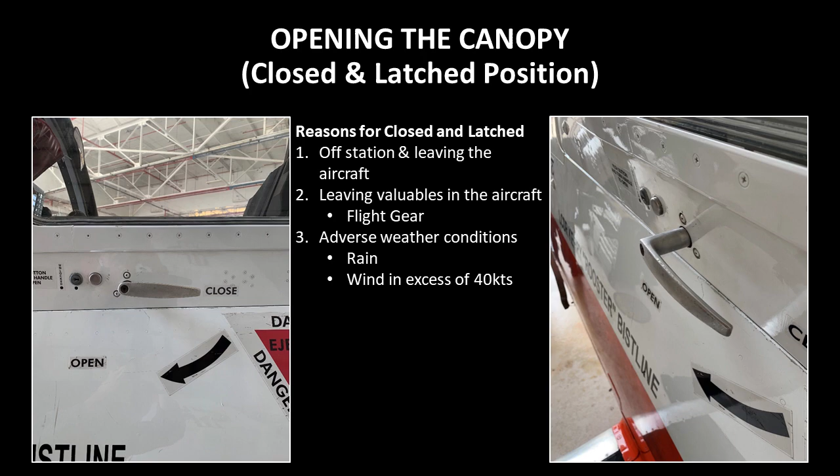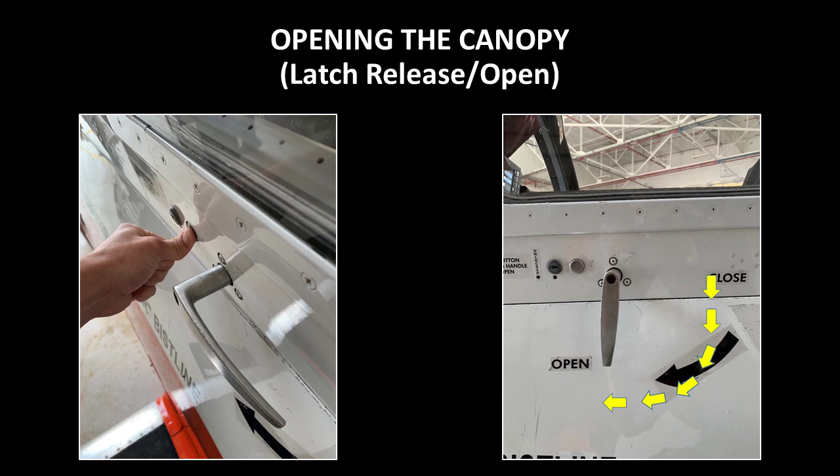In order to open the canopy from the closed and latched position, we will need to first press the button to the left of the handle to release the lock. Simultaneously grab the handle, moving it down and forward until it is perpendicular to the deck. You will feel the forward and aft latches release while the canopy moves slightly upward and off the rail. You can now lift up on the handle and move the canopy to the locked open position.

The following pictures demonstrate the canopy on the kickstand. The kickstand is normally used when there are no adverse weather conditions, but we are trying to keep air circulating through the cockpit and keep it cool on hot summer days. If you intend to put the canopy on the kickstand, ensure that it won't be raining for the duration and that winds are within limits.

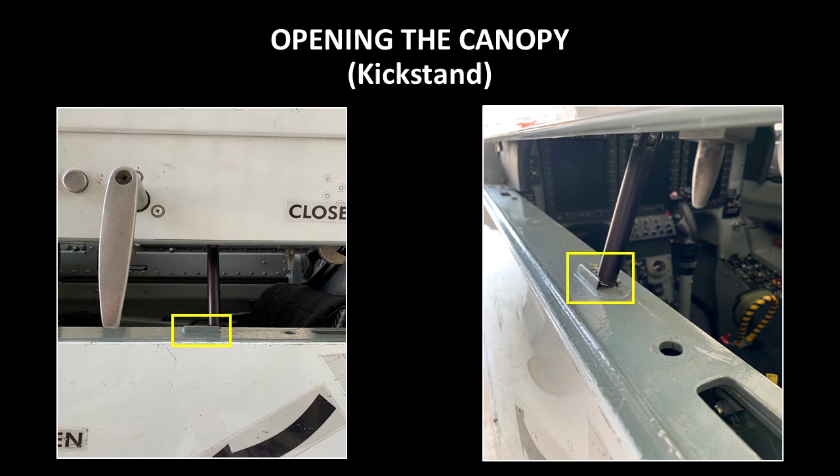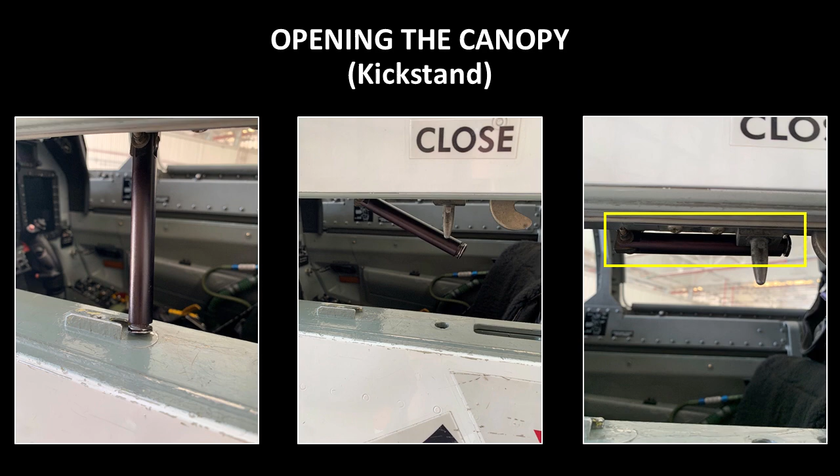When opening a canopy that's on the kickstand, the first thing we need to do is remove the kickstand from its catch. Do this by moving the kickstand aft until it is outside the catch. Then we can continue to move it up into the stowed position. Once the kickstand is in the stowed position, we can now lift up on the handle and move the canopy to the locked open position.

Let's take a moment and discuss the locked open position. In order to get to this position, you must open the canopy all the way. Once you pass a certain position, you can hear an audible click. That click is another latch that keeps the canopy locked in the open position, ensuring it won't close without releasing the lock. During pre-flight, IPs and students sometimes place knee boards or iPads on the canopy rails.

The canopy lock will prevent the canopy from closing and causing damage to our equipment and, more importantly, to the rail. Now that we have the canopy open, it is imperative that we do a few things before jumping into the checklist.

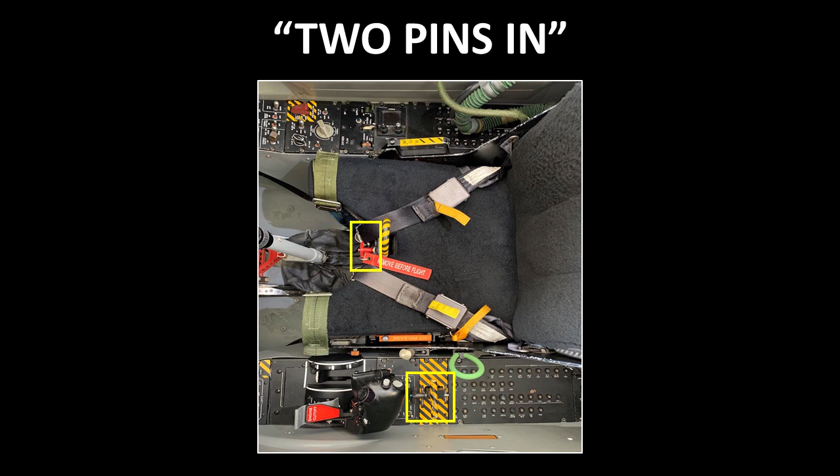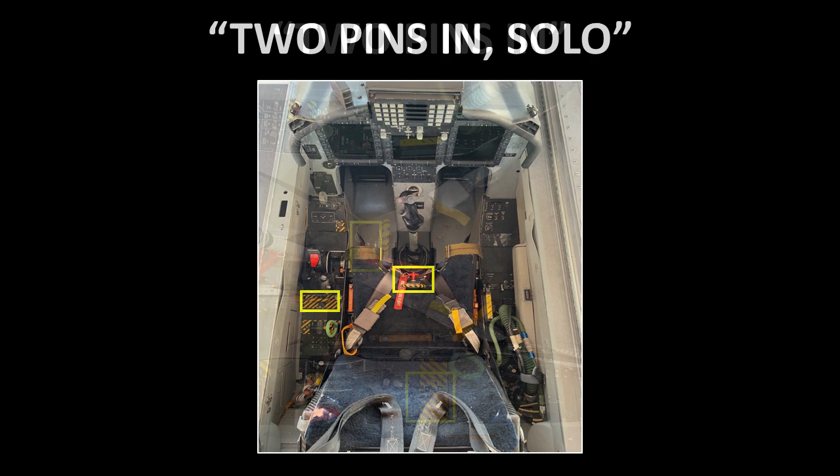First, the student will verify the ejection seat safety pin and CFS handle safety pin are fully installed. If the pins are properly installed, the student will say 'two pins in.' At the same time, the instructor will verify his or her ejection seat safety pin and CFS handle safety pin are fully installed, as well as verifying the ISS mode selector is in the solo position. If everything is correct, the IP will say 'two pins in, solo.' The student will then say 'Roger, solo.' This is for the student to verbally acknowledge that you understand the ISS mode selector is in the solo position. These are very important steps prior to the checklist, as it is vital that you ensure these pins are in the correct position and fully installed.

You should always treat the ejection seat and CFS handle as loaded guns. Any misstep or miscalculation where these systems are concerned could absolutely be fatal. Please treat these handles with the utmost care and respect.

Now that the canopy is open, let's jump into some cockpit preparation techniques. These techniques can be used to make cockpit preparation and entry faster, but it is not necessary to accomplish these tasks prior to beginning the checklist. If an IP gives you techniques that you like more, or you find something that works better for you, feel free to do those things as long as they fall within the confines of NATOPS and the FTI.

All switches on the upfront control panel should be in the down position. All buttons on the comm panel should be in, with the exception of the Vox, and all switches in the correct position. If you put your helmet on and your instructor is unable to hear you, you most likely have the Vox button pushed in. The parking brake should be set. If you plan to remove chocks to fully inspect the tires for your exterior pre-flight, it is vital to make sure the parking brake is set appropriately.

Your oxygen hoses and comm cords should be stowed facing aft, with the quick disconnect and orange O-ring on your emergency oxygen hose in place. Sometimes the clasp for the oxygen hoses and comm cords is broken. If this is the case, it will be annotated in the ADB with all FOD accounted for. If it isn't, this is a problem and the aircraft is down. As you get more acquainted with the T-6, you will be able to verify these things faster and faster.

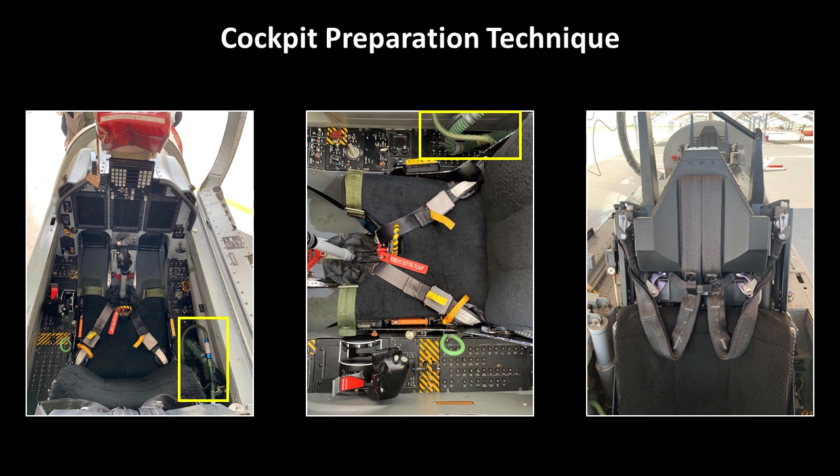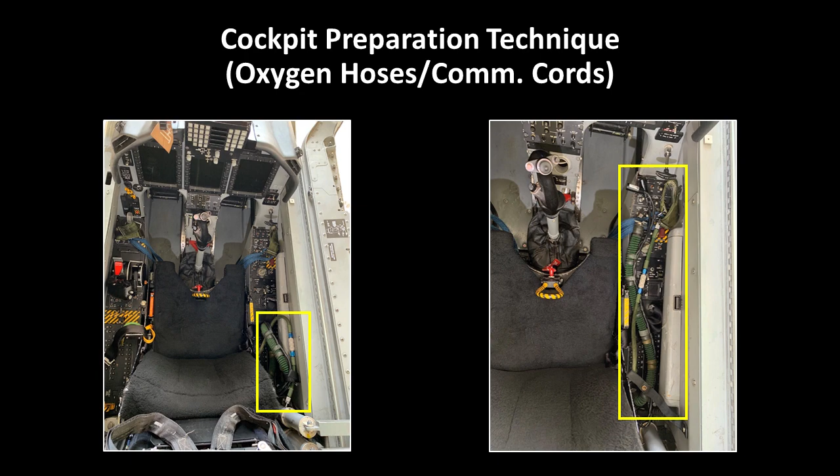Prior to jumping into the checklist, we can do a few things to prepare our cockpit for entry. First, move your leg restraint garters out of the way. You can unclasp them and place them on the deck or over to the side of each panel. Next, move your lap belts to the sides of the seat. This will facilitate you getting into the seat more quickly. Then unstrap your oxygen hoses and comm cord and lay them down on the panel. When setting up your seat this way, make sure the ejection seat pan and side consoles are clear of all lap straps, cords, and connections prior to adjusting seat height to prevent possible damage to the seat or equipment.

Lastly, remove the gust lock in order to put your rudder pedals in the correct position. This will keep you from having to adjust your pedals once you are already strapped into the aircraft. You should practice getting your rudder pedals into the correct position prior to your first flight. To set your rudder pedals correctly, use the simulators or ask maintenance control for access to the pre-flight bird. Set your seat to the desired height and run the rudder pedals all the way forward. Then move the pedals back to the position you are comfortable with while counting how many turns it takes to get to that position.

Alternatively, if you normally position your rudder pedals greater than halfway aft, you can also count the turns from the full aft position. Now that we have prepped the cockpit, let's get into the before exterior inspection checklist.

This checklist is completed prior to the exterior inspection. This is done to ensure the basic systems needed for flight are working appropriately before we go inspecting the exterior of the aircraft. If the items on this checklist are broken or inoperable, it makes doing an exterior pre-flight pointless.

Note that all checklist items in yellow are dual concurrence items, requiring a response from both the student and IP. Do not continue the checklist past dual concurrence items without getting a response from your IP.

The best way to practice dual concurrence is to have another student perform the checklist with you, acting as an IP. Have the other student purposely not respond to dual concurrence items so you can practice not skipping them. For the explanation portion of this video, we will not reference dual concurrence.

1. Seat safety pin installed. Verify that the ejection seat safety pin is fully inserted and that the remove before flight warning streamer is free and clear of the ejection seat handle.

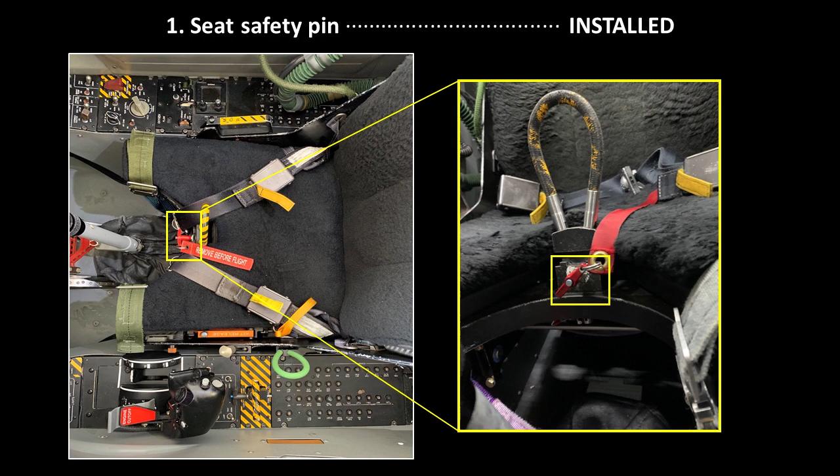2. Ejection handle, check condition. Ensure the metal loop in the ejection handle is not frayed or broken and that the molded covering is not cracking or faded. These pictures show the ejection handle in the appropriate position and condition.

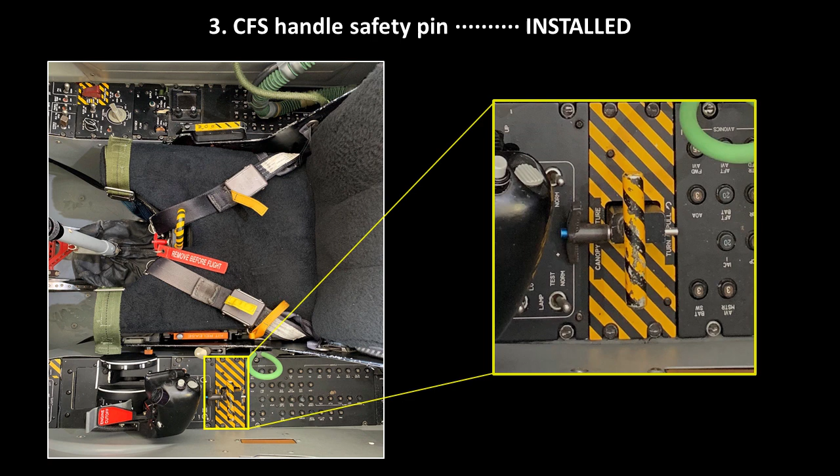3. CFS handle safety pin, confirm installed. Ensure the CFS handle safety pin is fully inserted through the handle with the bottom of the pin showing on the back side of the handle mechanism.

It is important to note that the CFS handle safety pin is a locking pin. In order to remove it, you must push on the head of the pin to be able to pull it out. It is vital you remember this in an emergency that requires you to blow CFS.

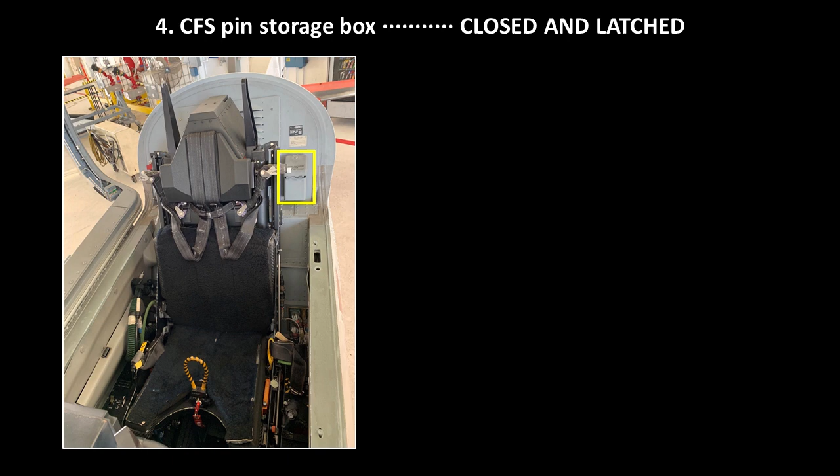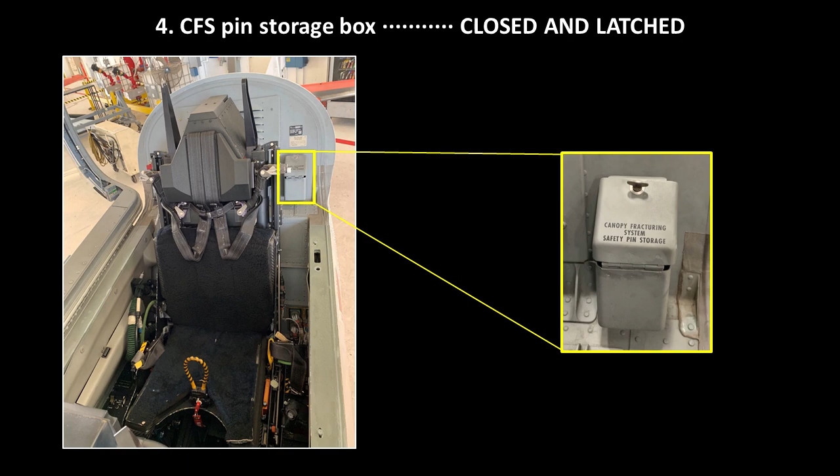4. CFS pin storage box, closed and latched. The CFS pin storage box is located in the rear cockpit and is no longer used for storing the CFS pins. Both pins will remain installed at all times until an emergency arises requiring us to remove them to blow CFS.

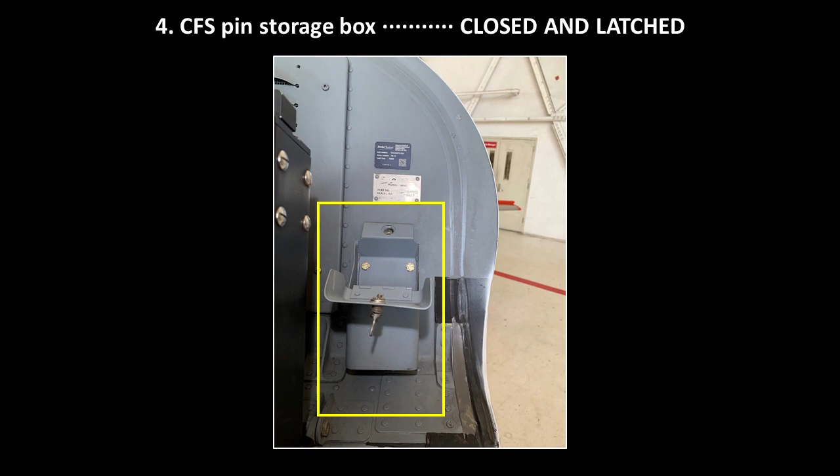Failure to close and latch the CFS pin storage box prior to closing the canopy may damage the canopy when attempting to close it.

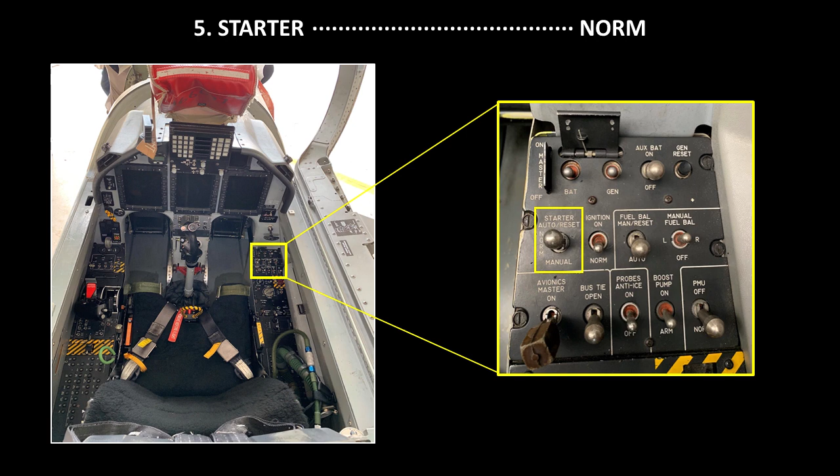5. Starter norm. With starter engaged, meaning the switch is in the auto or manual position, the propeller will begin to rotate after electrical power is applied to the aircraft. We do not want this to happen during this checklist. If the prop is not clear or still has covers installed, we run the risk of damaging the propeller or engine.

6. Ignition norm. 7. Avionics master off. 8. EVAP blower off. 9. ISS mode selector solo.

The checklist also states or command forward as required. As a student, you will never operate the aircraft on the ground or in the air with the mode selector in command forward. With the mode selector in both, both seats will eject if an unpinned ejection handle is pulled, even if the other seat is pinned. This setting ensures the rear seat fires and leaves the aircraft first in a very specific time sequence.

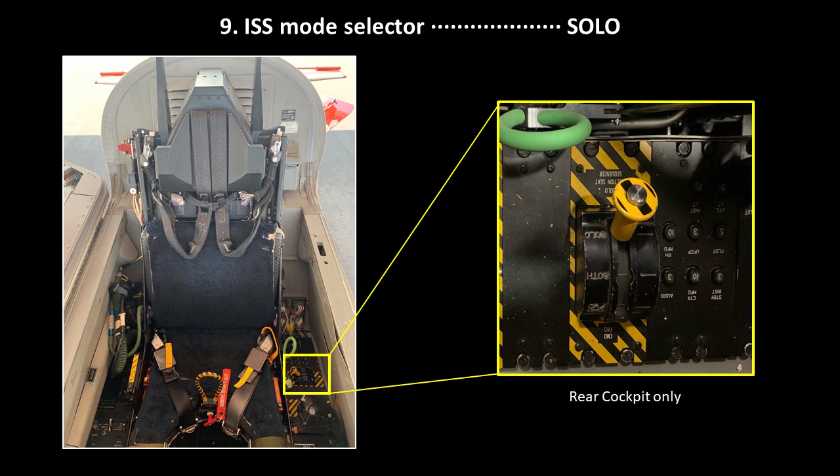Command forward is normally used when an IP is flying in front with someone unfamiliar with the T6 in the rear, such as a VIP receiving an introductory flight. With the ISS mode selector set to command forward, the crew member in the rear cockpit initiates ejection of the rear seat only, and the crew member in the front cockpit initiates ejection for both front and rear seats, with the rear seat ejecting first in the appropriate sequence, even if the rear seat ejection handle safety pin is installed. This prevents the IP from being ejected from a perfectly good airplane if the VIP accidentally pulls the ejection handle from the rear seat.

10. DTS DVR cartridge not required. Here the checklist states insert as required. We no longer use the DTS DVR cartridge. Maintenance will continue to install them in the aircraft, but they are not required for our purposes.

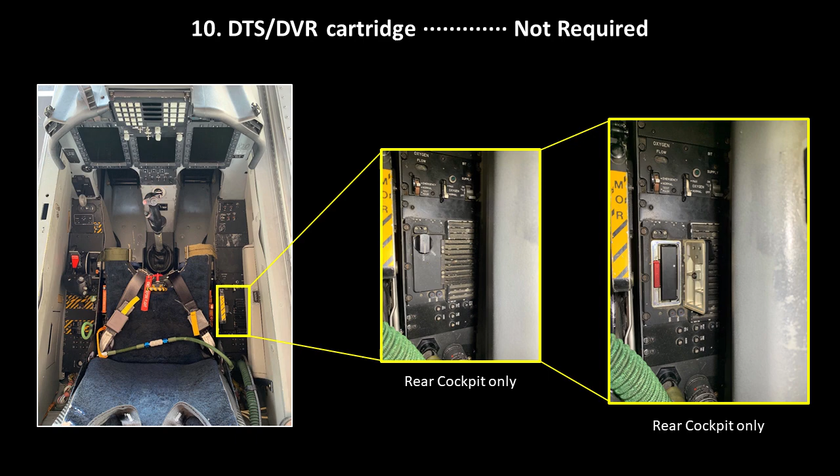11. Circuit breakers in. Make sure all circuit breakers are in on both the left and right panels. If any circuit breakers are out, report this to your IP and maintenance.

12. PCL check off. Verify 2 audible clicks per PCL and that the PCLs in both cockpits are interconnected and move freely through the full range of motion. The PCL incorporates a cutoff gate to prevent inadvertent engine shutdown. When the PCL is moved forward to idle during engine start, 2 roller bearings lock in place on the front side of a rocker cam detent to secure the cutoff gate.

Under the PCL, we have the finger lift guard, painted in gray, and the PCL cutoff finger lift, painted in red. The finger lift guard is in place to help avoid inadvertently pulling the PCL to cutoff in flight by blocking you from reaching the PCL cutoff finger lift.

Pushing down on the finger lift guard and then raising the PCL cutoff finger lift moves the rocker cam gate out of the way and allows the PCL to move to the cutoff position, effectively shutting down the engine. Some of the T6s on the line do not have the finger lift guard installed. You must be extra vigilant with your fingers around the PCL in these aircraft.

Verify positive idle stop and no forward PCL movement is required to move aft past idle stop to off. Verify PCL cutoff finger lift moves freely. Raise the PCL cutoff finger lift and verify the PCL can be moved from idle to off, and verify the finger lift guard returns to its spring-loaded position.

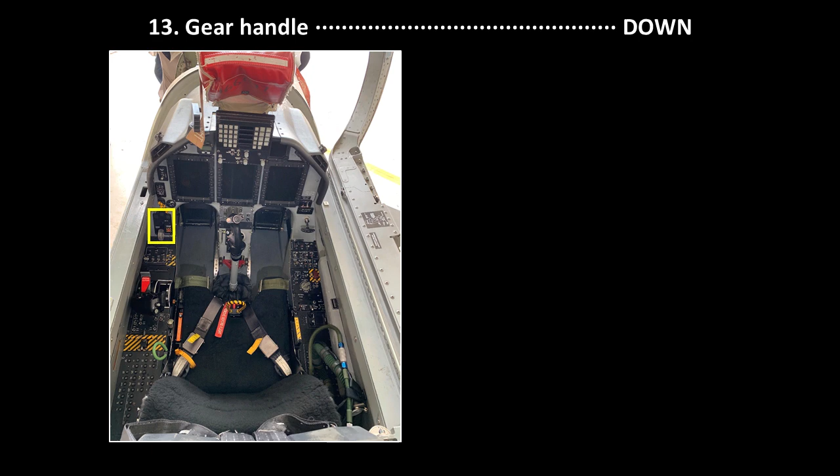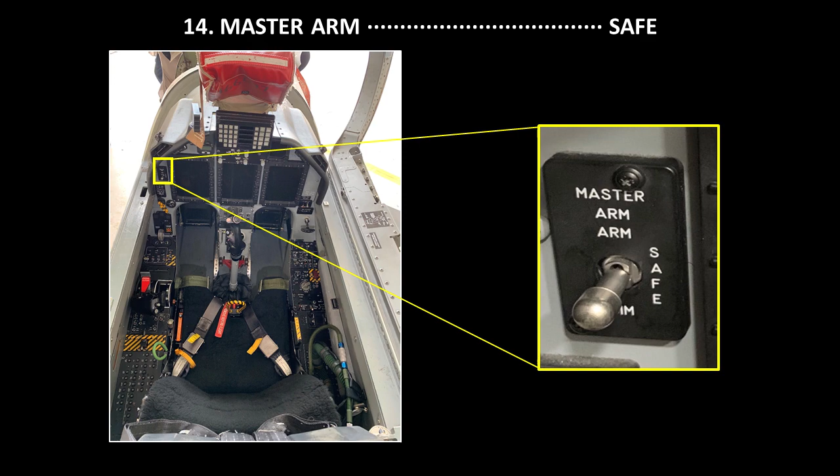13. Gear handle down. Verify the landing gear handles are down in both cockpits. 14. Master arm safe. Verify the switch is in the safe position. 15. Brake reservoir checked. Notify maintenance if the filler plug green band is not visible or the lower red band normally beneath the bulkhead shows.

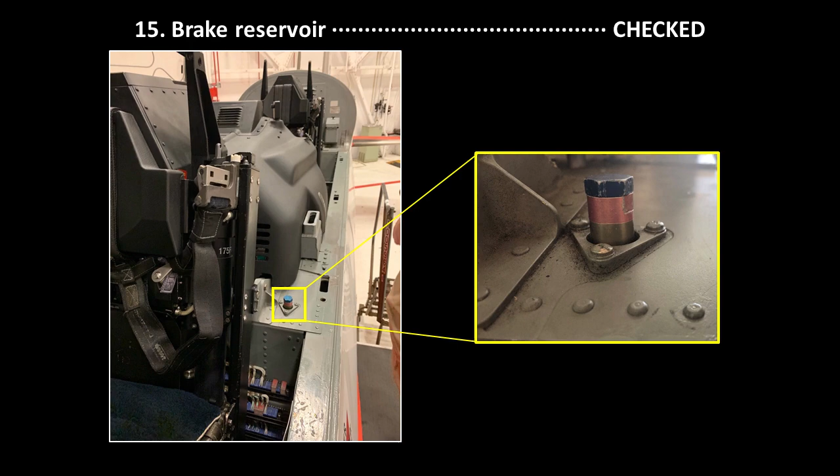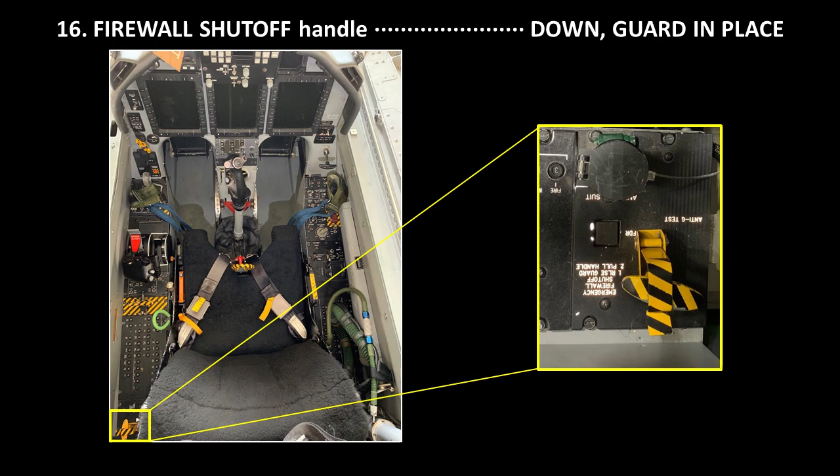The lower red band indicates an overfill while the upper red band indicates the fluid level is low, provided you cannot see any green. 16. Firewall shutoff handle down. Guard in place. Verify the handle is in the down position and that the guard latch is folded securely over the top of the handle. 17. Aux bat on.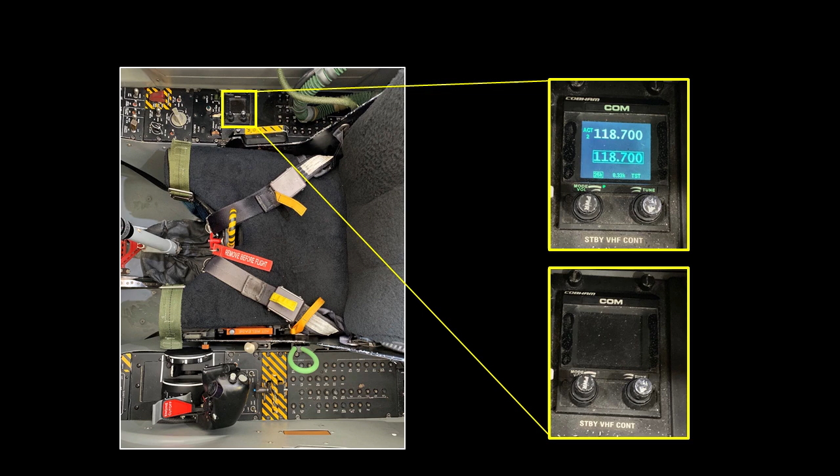As a technique, IPs will recommend you go ahead and turn on the standby VHF control head at this time. You are already in the general location and it takes a moment for the standby VHF control head to spool up. Turn this on and come back to it in the checklist on item 19. To turn it on, press down on the button to the left labeled Power, PWR.

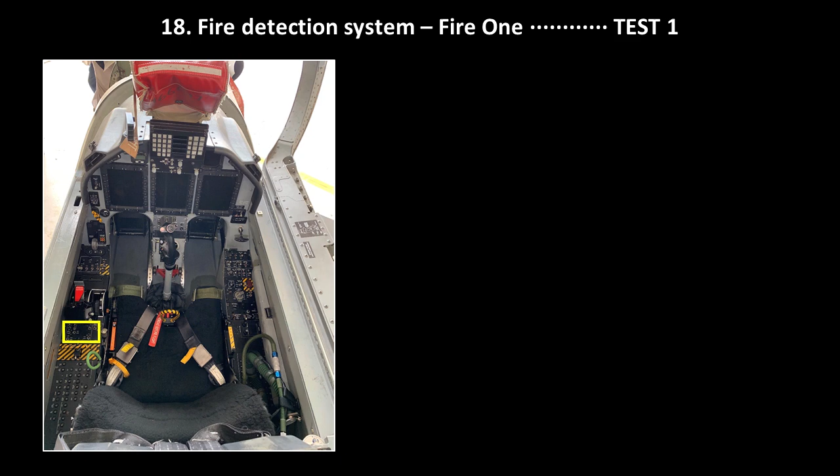18. Fire detection system, Fire 1, Test 1. Hold the fire warning test switch to the Fire 1 position. Check that both bulbs in the upper half of the fire light illuminate in both cockpits. Fire 2 is not run off the auxiliary battery and will not be tested here.

19. Standby VHF control head checked off. If you already turned this on after turning on the auxiliary battery, verify that the screen is not damaged and displays the correct information, and hold down the power button. You will see a countdown for 3 seconds on the screen. Hold the button down until the countdown is complete to turn the standby VHF control head off.

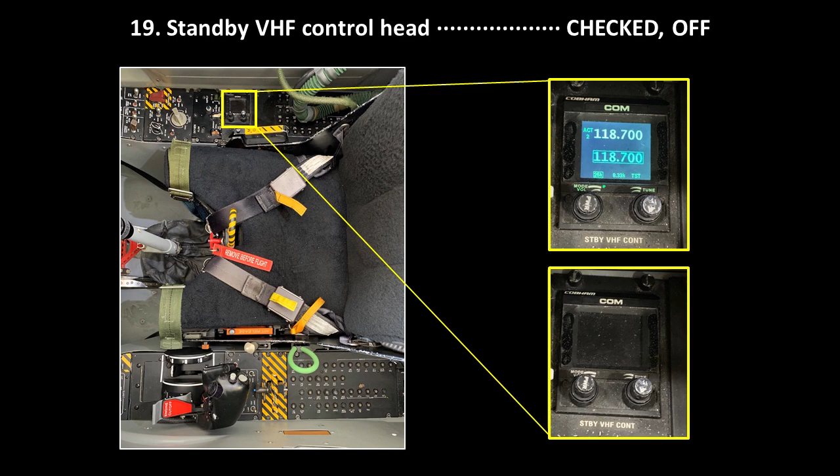If you accidentally leave the screen on or accidentally turn it on at some later point, the word remote will be present on the VHF screen of your UFCP. This message lets you know the standby VHF control head is on. 20. Backup flight instrument check.

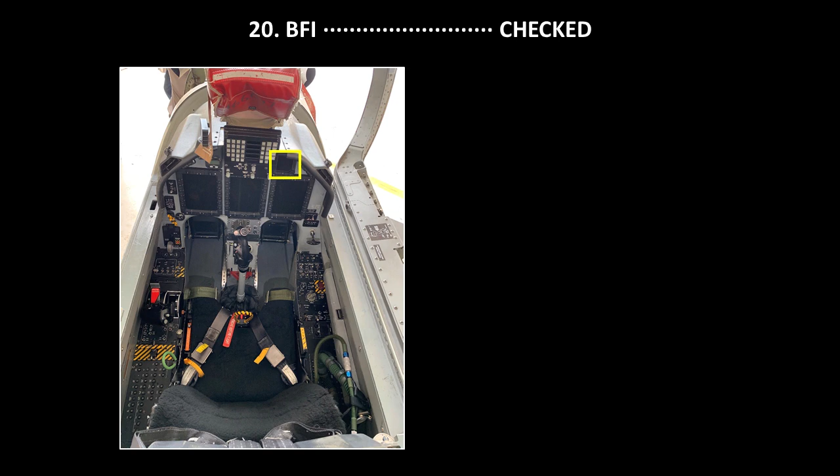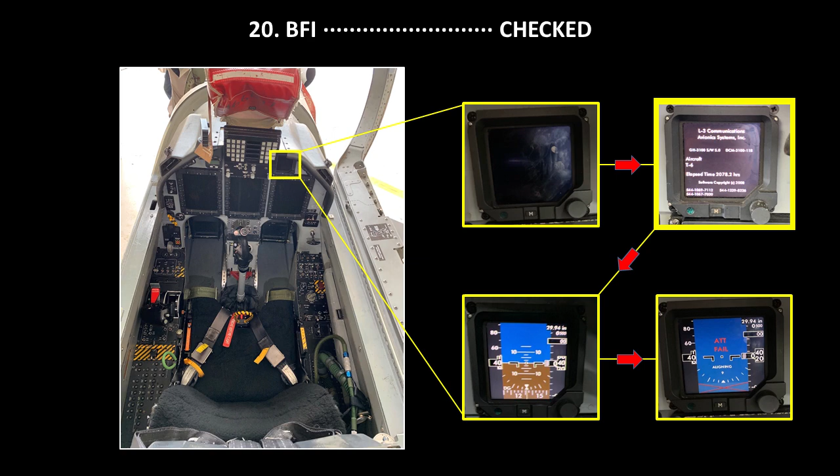Verify that the BFI in each cockpit is receiving power and no fault messages are visible. Note that the BFI will not relay accurate information until it aligns, and therefore it will display a red X and alignment countdown upon initial power-up. For the purposes of this checklist, if you see the L3 communications page come on, you can consider the BFI checked.

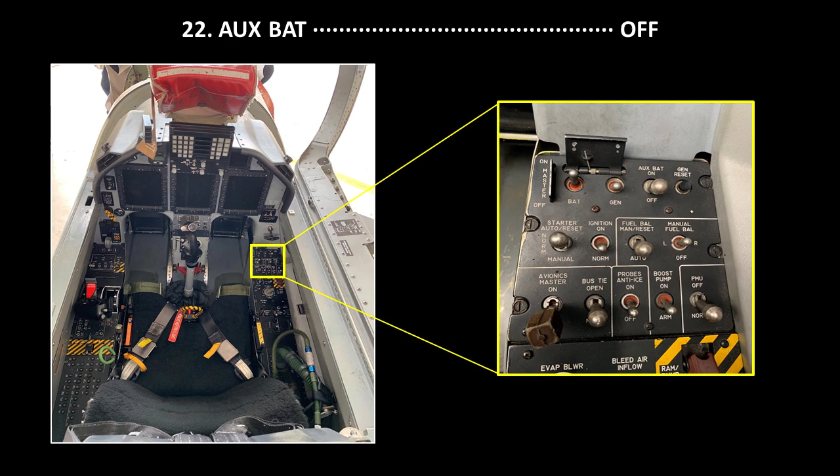23. Aux bat test. Hold the aux bat test switch forward to test for a minimum of 5 seconds and ensure the green test light remains illuminated until the switch is released. If tested too soon after placing the auxiliary battery to off, the light may not illuminate. If this is the case, reattempt. If the light still fails to illuminate, the auxiliary battery is not functioning properly. Notify maintenance to determine if the aircraft is down.

24. Battery voltage, 25 volts. You can see on the screen we have 25 volts. Call out the number you see. Verify a minimum of 23.5 volts for a battery start or a minimum of 22 volts for an external power start.

Always use an external power cart when able to help preserve battery life. We will always use external power carts at Vance.

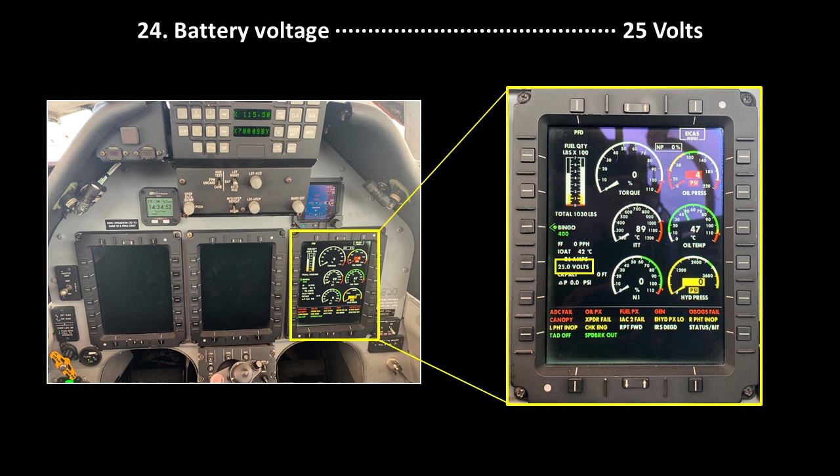As a technique to improve checklist speed, you can begin moving your seat to the desired position while the screens are starting up. Ensure the ejection seat pan and side consoles are clear of all lap straps, cords, and connections prior to adjusting seat height to prevent damage to the seat or equipment. Your shoulder straps should be connected to the headrest before adjusting your seat.

25. Fuel quantity, 1,030 pounds, heavy on the right. As a technique, students will also add heavy on the right or left to remind them of the need to reset the fuel system. In this case, we are heavy on the right.

The amount of fuel you observe should be fairly close to what you wrote down from the A sheet. If the quantity varies greatly, there could be a problem and maintenance should be notified. It is also normal to see a fuel imbalance. The aircraft could be heavy on the right or heavy on the left. Once the aircraft is started, there are things we can do to resolve this problem.

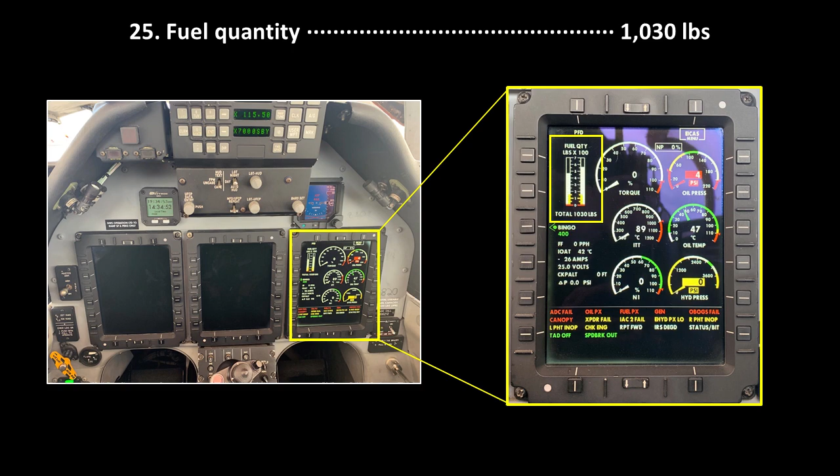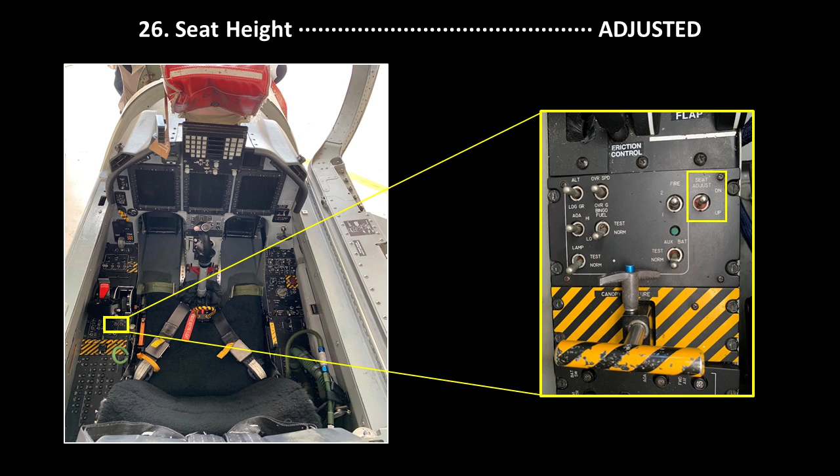26. Seat height adjusted. If you have not already done so, adjust your seat height to the desired position. Remember to ensure the ejection seat pan and side consoles are clear of all lap straps, cords, and connections prior to adjusting seat height to prevent damage to the seat or equipment. Your shoulder strap should be connected to the headrest before adjusting your seat.

27. Battery off. Turn the battery switch off. 28. CFS donor assemblies inspected.

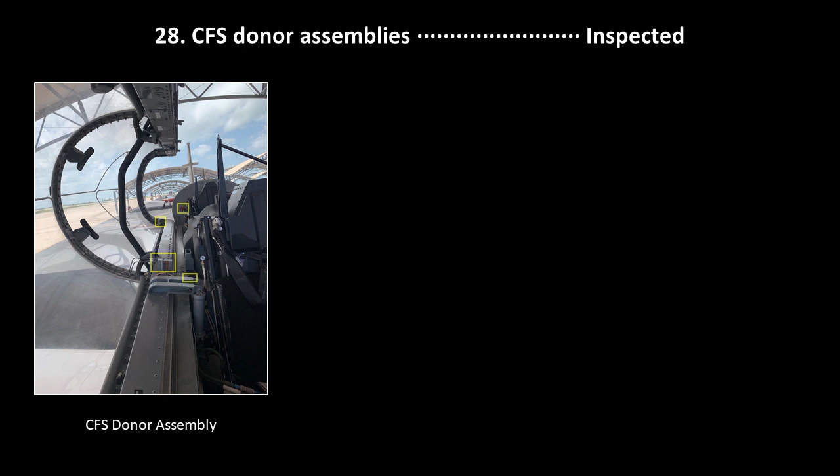Inspect the front and rear cockpit for protruding firing plungers. Actuation of a CFS initiator will cause the detonator to fire plungers in the CFS donor assembly. These plungers will not cause detonation of the CFS explosive cords if the canopy is open, but will be in a position to initiate detonation when the canopy is closed.

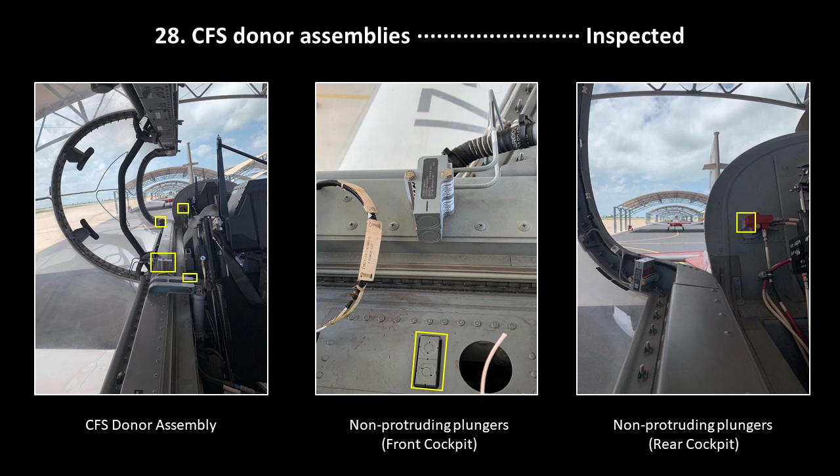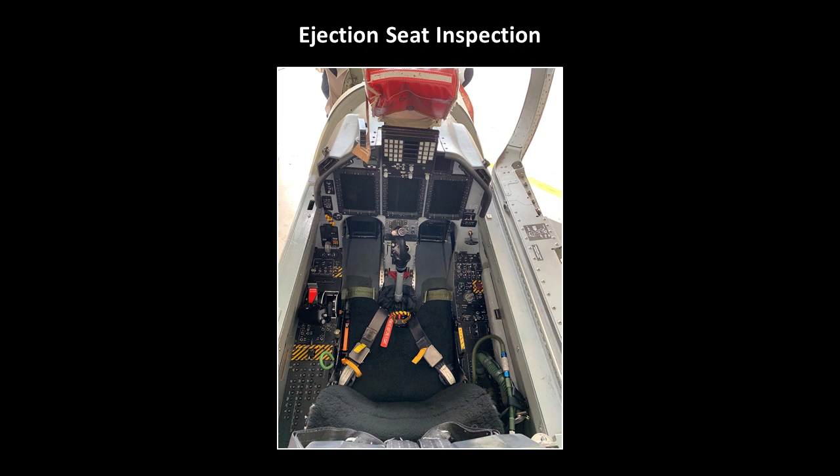Now we are at the point in the checklist where we will go through all the things you need to inspect on your ejection seat. It is imperative you pay close attention to and thoroughly inspect all these items, as the ejection seat could save your life. Do not voice the items you are inspecting. Just go through each item and announce inspected when you are done.

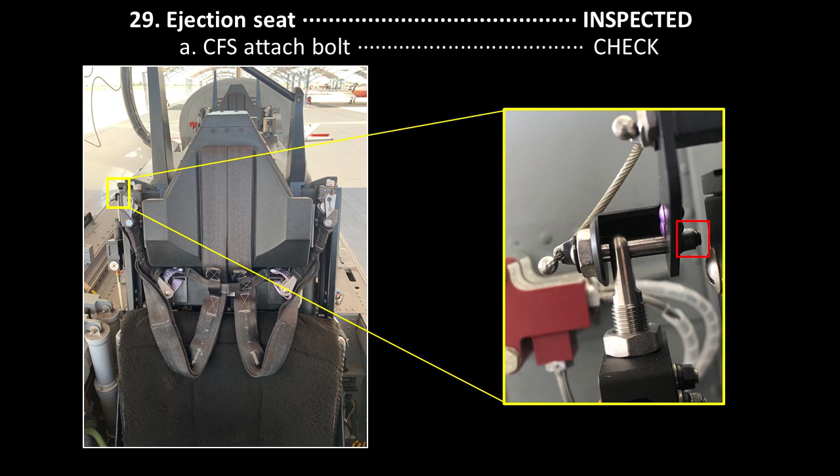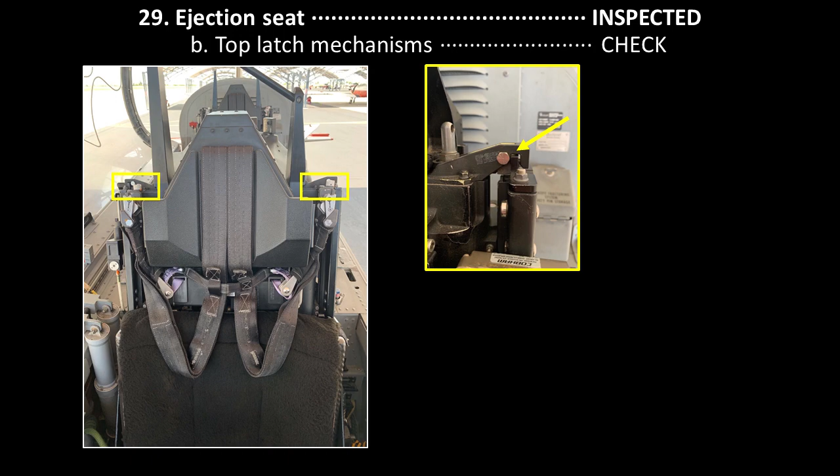29 Alpha. CFS attach bolt. Check. Ensure the bolt threads are visible facing inboard towards the seat as depicted. 29 Bravo. Top latch mechanism. Check. Ensure the latches are rotated down towards the seat and in the correct position fore and aft.

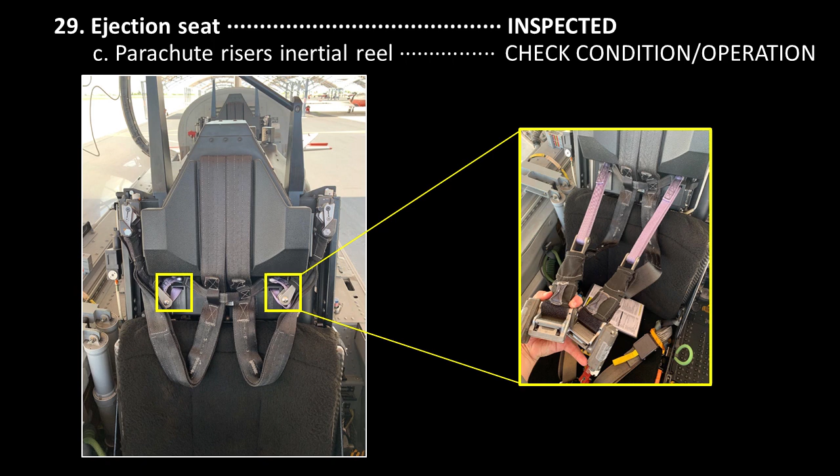29 Charlie. Parachute risers, inertia reel, check condition and operation. Pull both parachute riser and inertia reel straps out to their full extension. Ensure both parachute riser and inertia reel straps are pulled out slowly and simultaneously. Attempting to test the locking ability of the straps may damage the harness reel velocity lock mechanism.

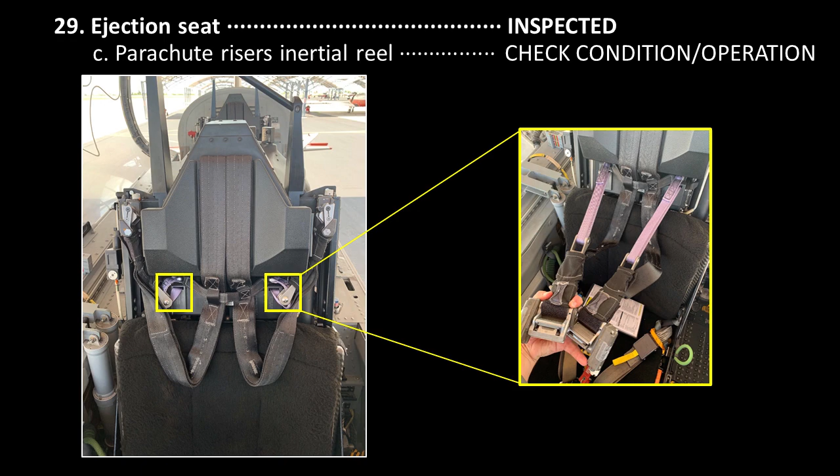Allow both straps to slowly and simultaneously retract. Inertia reel straps should fully retract freely without binding, twisting, or leaving any slack. A jammed inertia reel will prevent proper harness operation and increase the risk of injury during ejection. If jamming or binding occurs, or if inertia reel straps do not fully retract, notify an egress specialist prior to

flight. 29 Delta. Lap straps. Check condition.

When moving the lap straps, place them gently onto the side consoles so as not to cause damage. Check condition of woven belts, Koch fittings, and yellow release tabs.

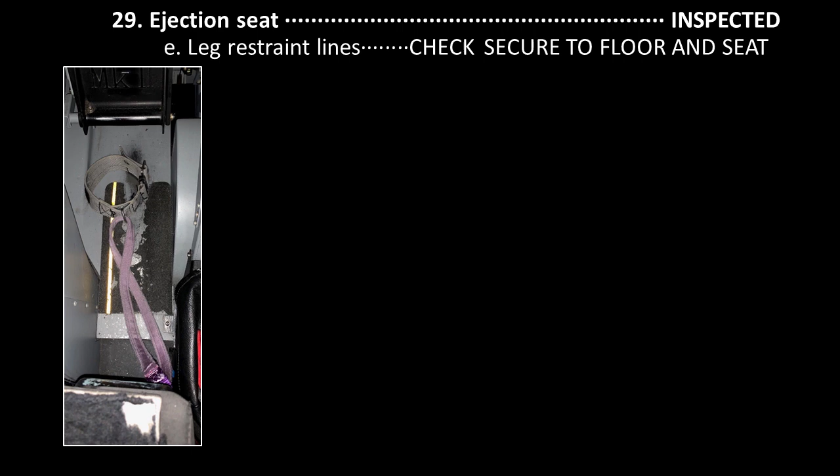29 Echo, leg restraint lines. Check secure to the floor and seat. Make sure the lines are not visibly twisted or worn and that the shear ring is in between the floor and snubber unit. If the shear ring is retracted into the snubber unit or on the wrong side, it can cause catastrophic problems with your ejection.

29 Foxtrot, ejection seat manual override handle. Visually check full down and locked. Do not lift the MOR handle.

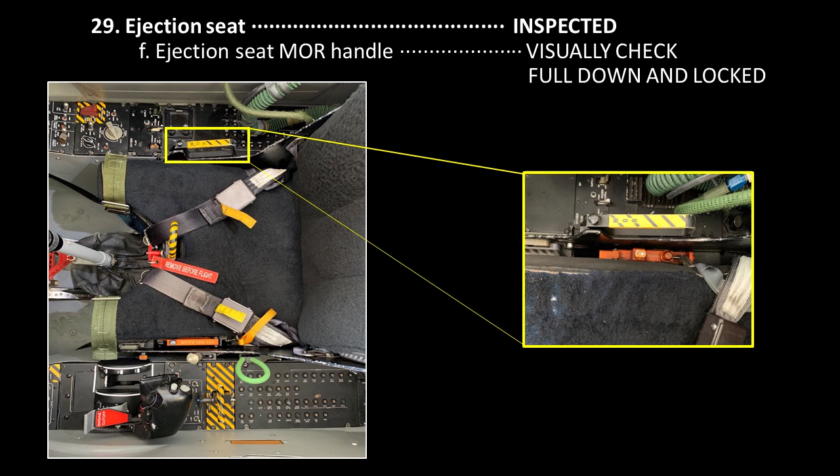Lifting the MOR handle can result in initiation of the manual release sequence, which can cause injury or death to personnel and/or damage to equipment. Ensure the white selector arrow next to the MOR handle is pointing to manual.

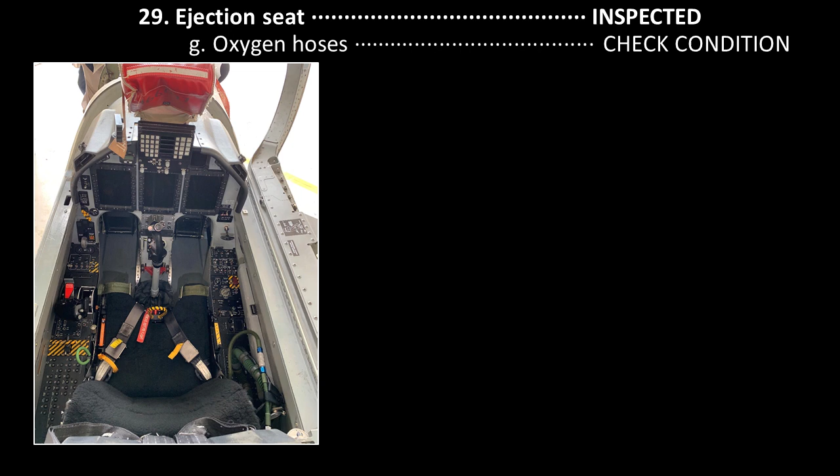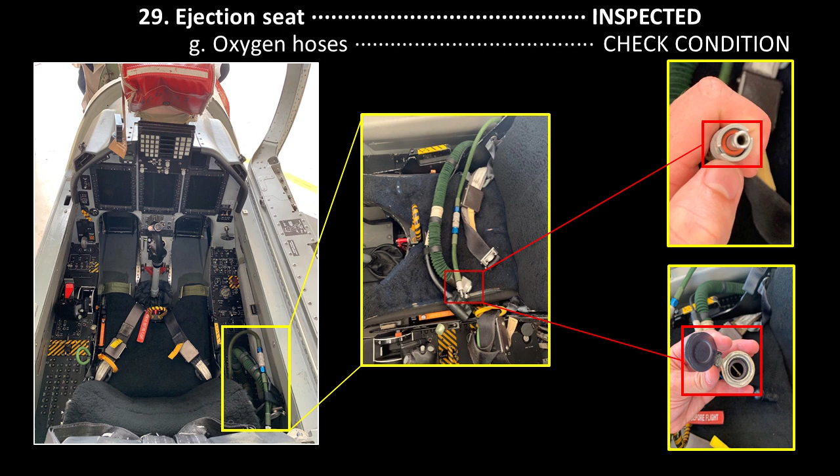29 Golf, oxygen hoses, main and emergency. Check condition. Ensure hoses are not damaged and emergency oxygen hose orange O-ring is in place, as well as the dust cover with associated spring on your main oxygen supply hose. If either the orange O-ring or the dust cover and spring are missing and do not have the proper annotation in the ADB, notify maintenance.

29 Hotel, seat survival kit, SSK. Set and check. Make sure the ADU mode selector switch is in the desired position and visually inspect that ADU and radio beacon cables are properly connected to the ejection seat.

If ADU and radio beacon cables are not properly connected, the automatic function of the SSK will fail, and the radio beacon will not automatically activate if the ejection sequence is activated.

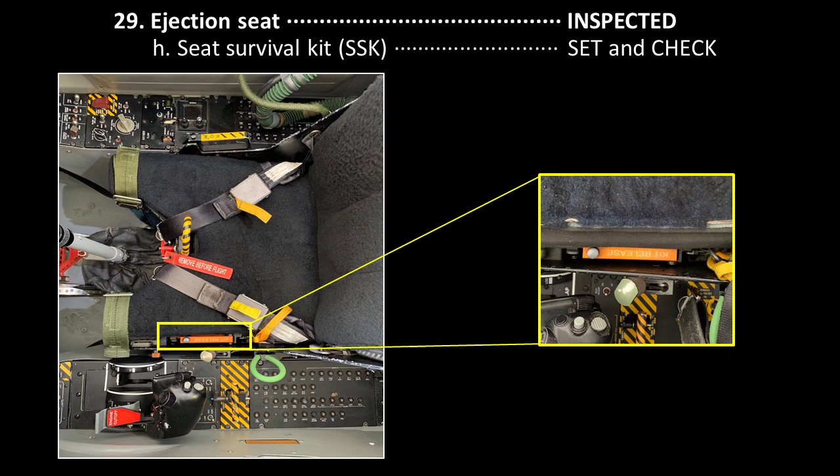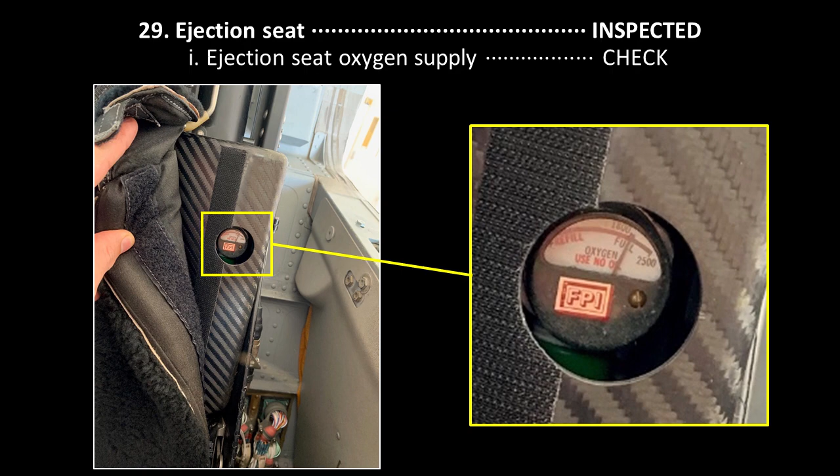29 India, ejection seat oxygen supply. Check. The emergency oxygen cylinder will be charged to a minimum of 1800 psi at 70 degrees Fahrenheit. However, indicated pressure is affected by temperature changes.

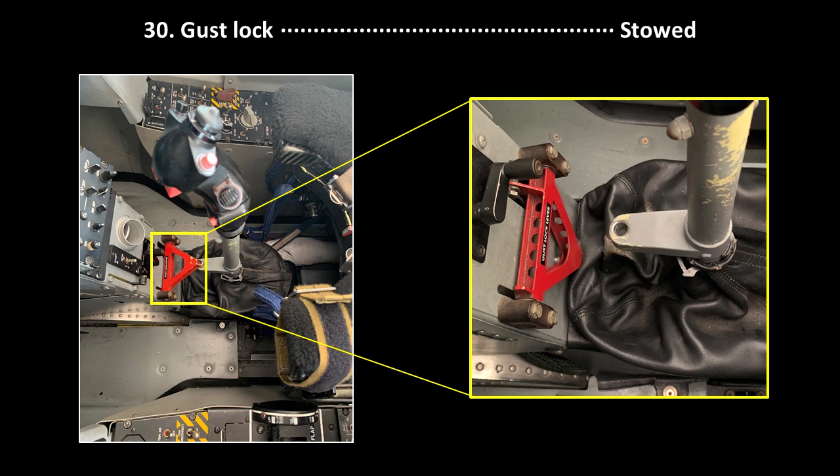Remove the gust lock from the control stick and ensure it is fully stowed. Slight backstick pressure on the stick may be necessary to remove the gust lock. Pull up on the gust lock initially and then let it down. Failure to stow the gust lock completely may prevent the flight controls from operating properly.

Any attempt to actuate the flight controls with the gust lock not properly stowed may result in damage to the flight control assemblies. Ensure the gust lock is not impeded by the leather boot at the base of the control stick. Make sure the silver tab is fully inserted at the base of the console.

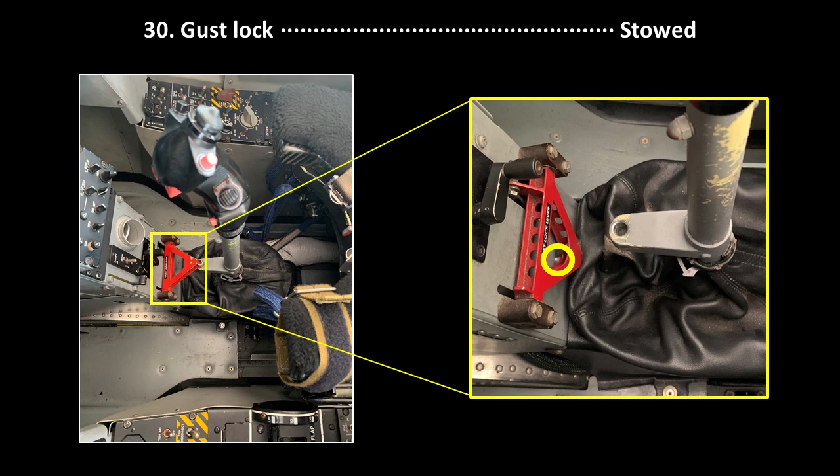31, HUD combiner cover removed and stowed. Place the HUD combiner cover in your map case or bring it down and place it in the baggage compartment after the before exterior inspection checklist is complete. Before exterior inspection checklist complete.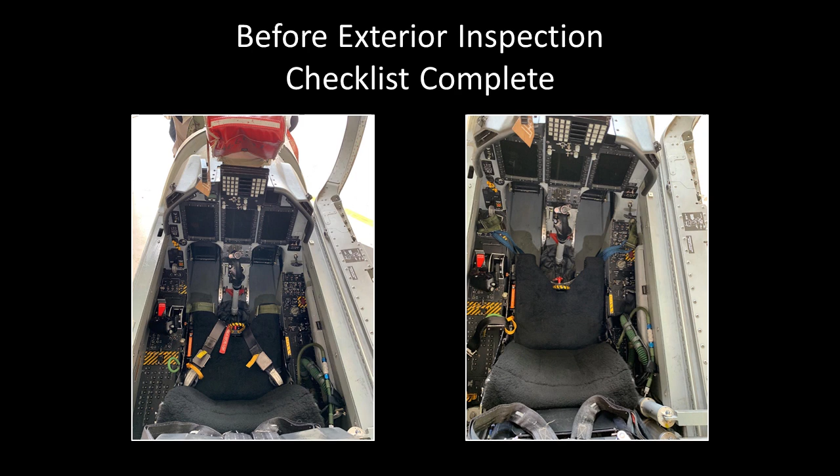As a technique, if you ever have to hold a checklist, make sure you voice holding the checklist at battery off or wherever you are holding it. This will cue you and your instructor in on the fact that the checklist is not complete, which can help prevent mishaps. Always remember to close out a checklist whenever all the items are complete, by saying, before exterior inspection checklist complete.

Now that we have taken a detailed look at the before exterior inspection checklist, let's see its practical counterpart. Before jumping into the checklist, let's take a look at some of the cockpit preparation techniques we used before. These techniques can help you get faster at running the checklist, but are not necessary. To be considered proficient, you should be able to run the before exterior inspection checklist in under 2 minutes and 30 seconds.

Coming up to the cockpit, as a technique, sometimes I like to set my cockpit up before we get into the checklist. So some of the things you can do, we'll just run through and check really quickly. PCL should be in the off position.

The landing gear handle should be down. The emergency gear handle should be in. We should check all these switches to make sure that they're down on the UFCP, so all of these should be in the down position. Want to make sure that your COM buttons are in, but your VOX buttons should be out.

You can go ahead and remove the gust lock. So you'll need to pull back on the stick, remove the gust lock, and make sure that it goes all the way in the hole.

Making sure that your parking brake is set, and then all the switches on this side, and then coming down and releasing this to make sure that your oxygen and your COM cords are down. We put those down there. And then I move these straps out of the way on my seat.

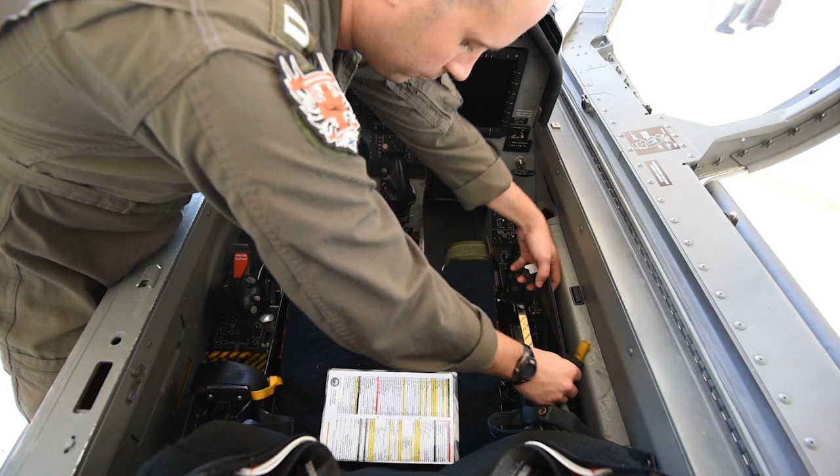And then you can take your leg restraint garters off, and put them over on the sides here, like so, after you've checked your switch position, or you can take them and put them down on the floor. Alright, now that that's out of the way, let's get into the before exterior inspection checklist.

Seat safety pin installed. Installed. Ejection handle checked. Checked. CFS handle safety pin confirm installed. Installed. CFS pin storage box, closed and latched. Roger. Starter norm. Norm. Ignition norm. Norm. Avionics master off. Evap blower off. Off. ISS mode selector, solo. Roger solo. DTS DVR cartridge, not required.

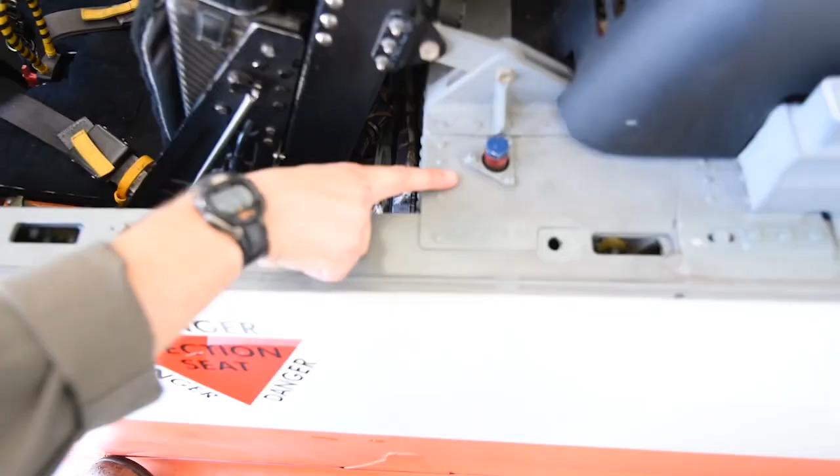Circuit breakers in. In. PCL check off. Checked off. Gear handle down. Down. Master arm, safe. Brake reservoir, check. Firewall shutoff handle down, guard in place. Aux bat on. Turn on the standby VHF control head.

Fire detection system, fire 1, test 1. Test 1. Standby VHF control head, check. Off. Backup flight instrument, good BFI. Good BFI.

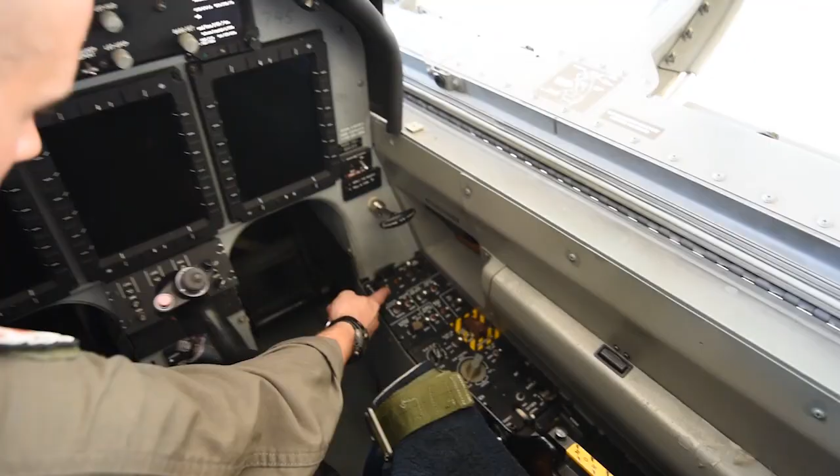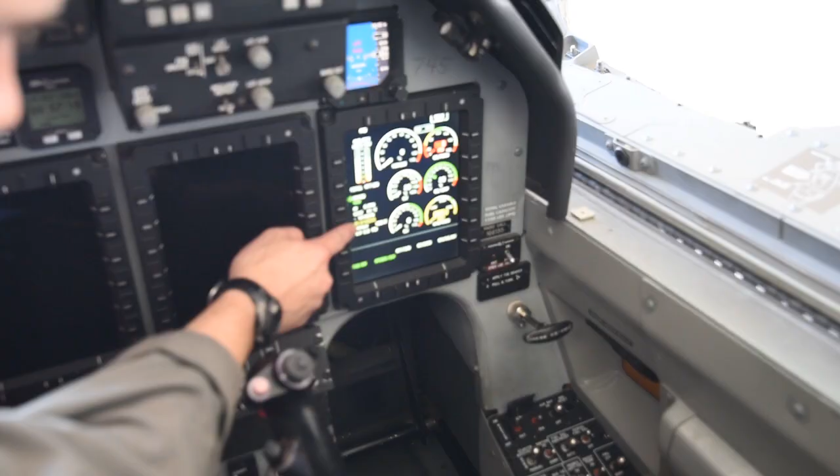Fuel quantity, 978 pounds, slightly heavy on the left. Seat height, adjusted. Adjusted. Battery off. CFS donor assemblies.

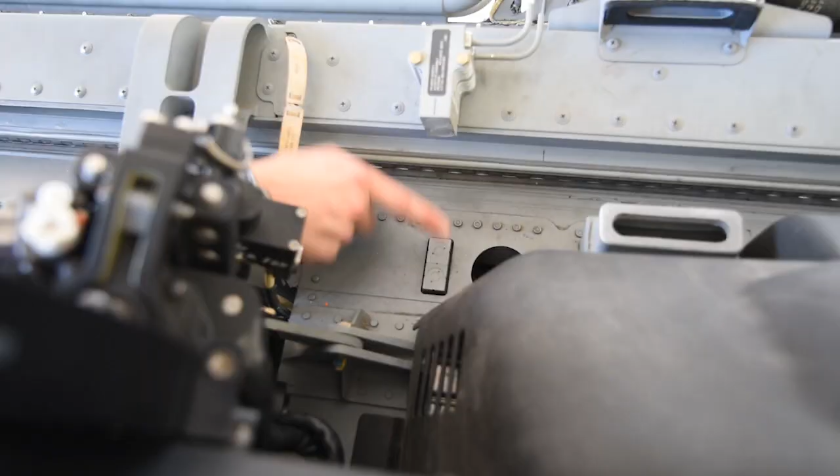Inspected. Inspected. Ejection seat. So normally I start here. I check my leg restraint garters and the lines. You want to make sure that the shear ring is not retracted into the snubber unit. Check the MOR handle and make sure that it's down. Don't pull up on it.

But I check to make sure that the seat is in the manual position. That looks good. I want to check our oxygen hoses and comm cords, make sure that the orange O-ring is there, that the dust cover is in place, and that the lines are all good. You can lay these down on the side.

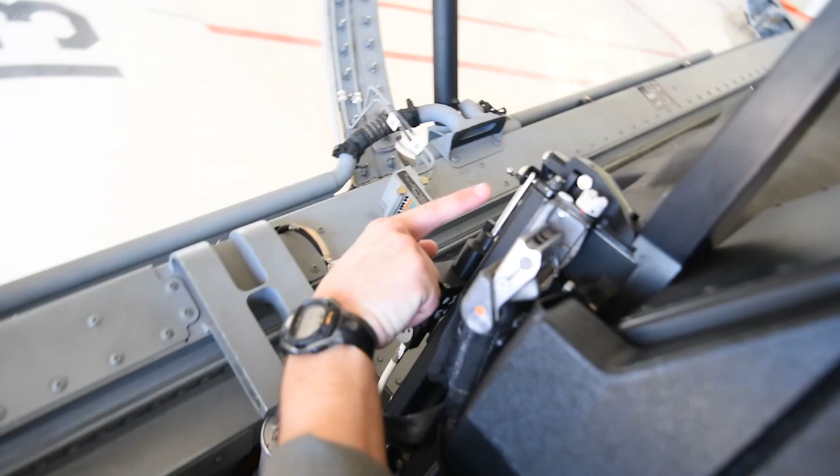Then I check to make sure that my restraints are good. Move this over to the side. And then coming up on the side here, you want to check to make sure the Cephas attach bolt looks good, and the top latch mechanisms on both sides are good. Then moving over to the top, you want to check to make sure that the top looks good.

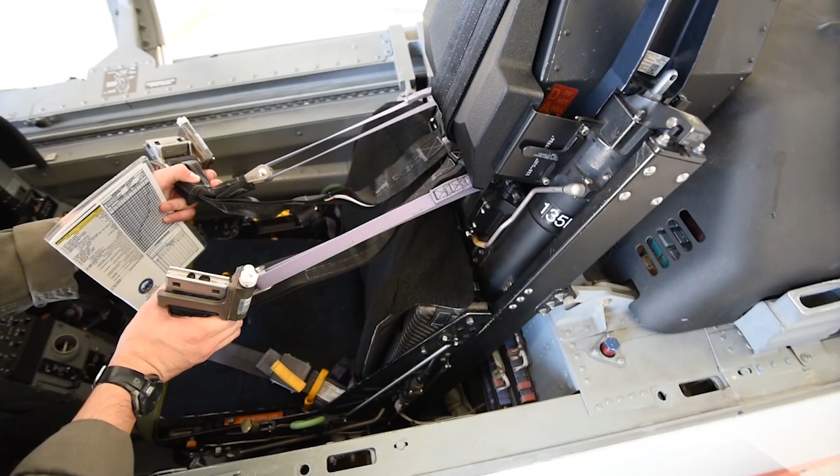This is the punch for the canopy if you actually have to eject. Coming down the side over here, the top latch mechanism on this side is in the correct position. You want to check your parachute risers and inertia reels. Extend them fully and then release them and put them back in the proper location.

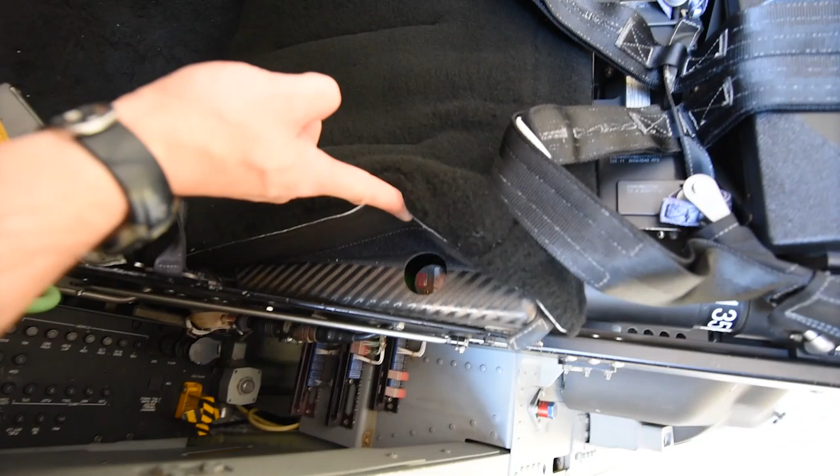And coming down this side here, you want to check to make sure that your oxygen is good, make sure that it's full and in the green. If it's not, you want to check the temperature for that day. Then coming down further, you want to move this out of the way. Make sure that your oxygen green pull ring is in the correct position.

Your SSK, make sure that the handle is down and in the correct location. Make sure that your seat is not locked. This is in the unlocked position, this is the locked position. Make sure that you're unlocked. And then make sure everything underneath here looks good, connected.

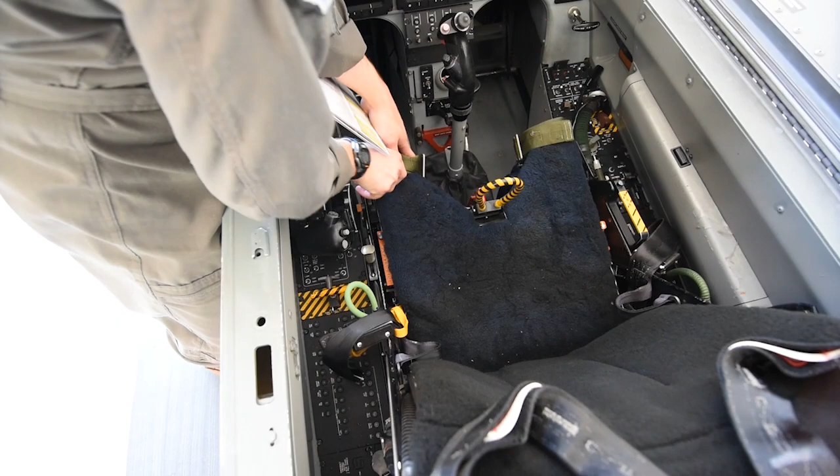You want to check the leg restraint garter, make sure that everything looks good there. And then check to make sure that your shear ring is not retracted into the snubber on this side as well. Ejection seat, inspected. Inspected.

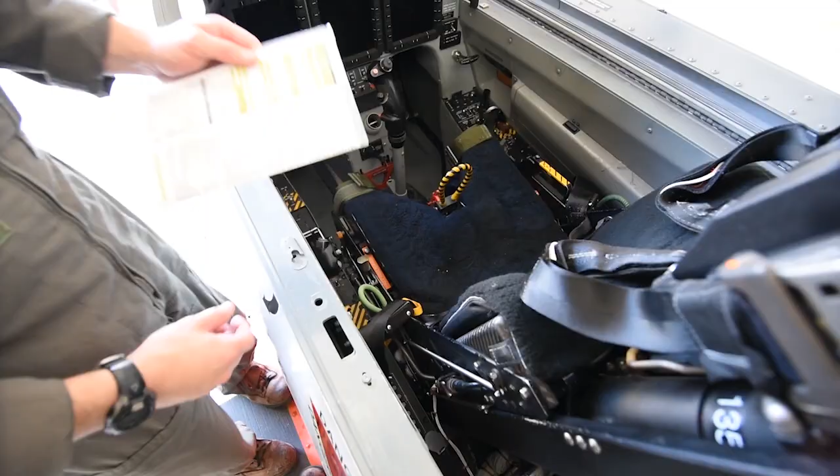Make sure that your seat height is correct and that your rudder pedals are adjusted. Make sure that the gust lock is stowed. HUD combiner cover is removed and stowed. Before exterior inspection checklist complete.